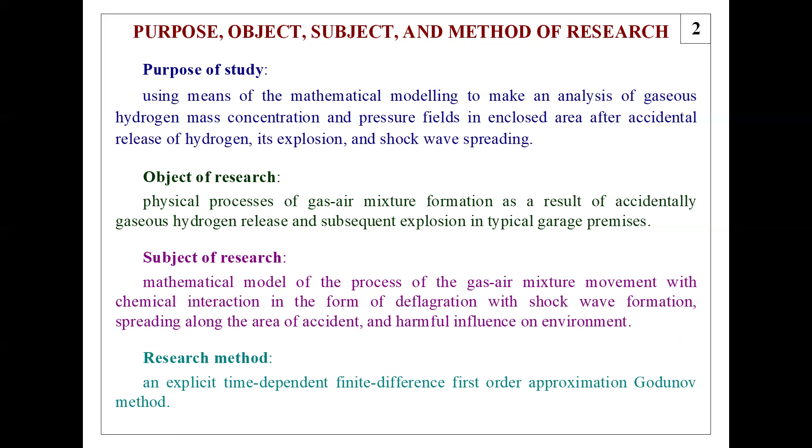The research focuses on the physical processes of gas-air mixture formation and explosion dynamics in typical garage conditions. A mathematical model describing gas movement and chemical interaction during deflagration and shock wave development was developed. The modeling employed an explicit time-dependent finite difference Godunov method of first-order accuracy.

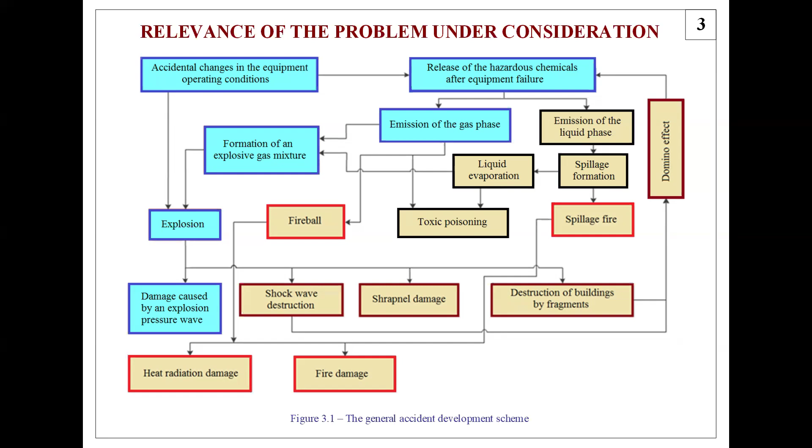The relevance of the study is determined by the need of the community of experts in the field of safety assessment of high-risk industrial enterprises and such civil objects as garages for reliable and effective mathematical models that will allow simulating complex physical processes that arise during an accidental release of such explosive gases as hydrogen into the atmosphere. Such models should replace expensive large-scale physical experiments for analyzing and predicting the consequences of an accidental explosion for the environment.

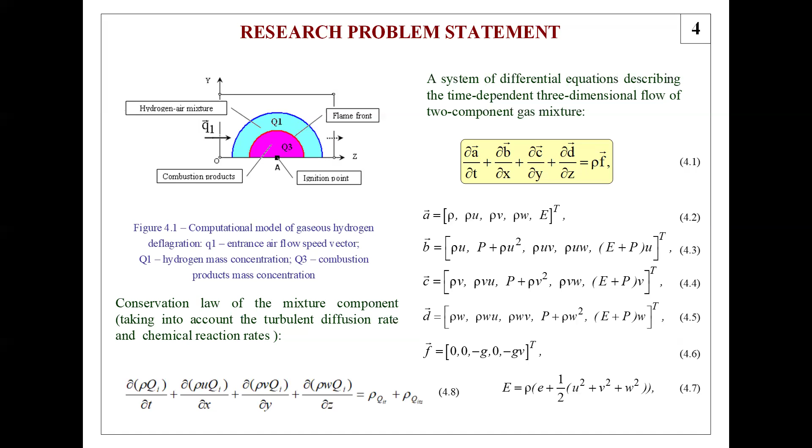The instant release of a given amount of gaseous hydrogen is considered. The admixture forms a gas-air cloud which moves under the influence of the wind. The system of differential equations of motion of a three-component gas mixture includes the laws of conservation of mass, momentum, and energy of the mixture, supplemented by the laws of conservation of hydrogen and combustion products mass. The equation of state of the mixture completes the system of equations.

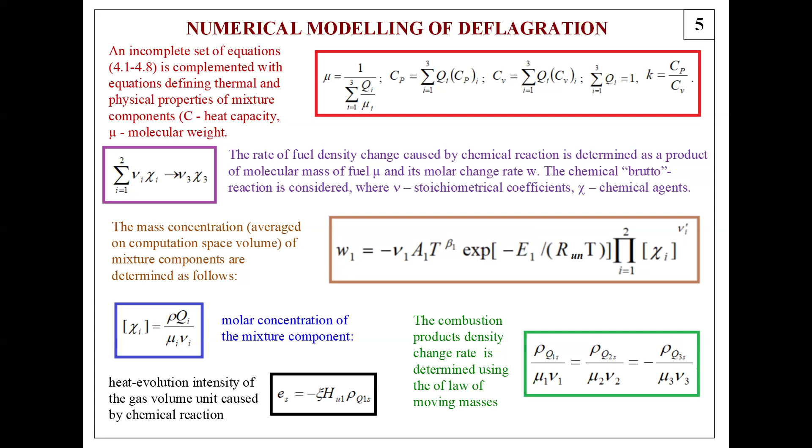According to the suggested combustion model, it is assumed that the chemical reaction takes place in the elementary volume with a rate that can be determined under consideration of the chemical brutto reaction. The molar change rate is determined using the parameters obtained on the basis of experimental data generalization and Arrhenius reaction constant. The density change rate of the combustion products is determined on the basis of the law of mass motion.

The developed mathematical model of gas deflagration was validated using data from physical experiments and other model simulation results. Firstly, an explosion of the hemispheric homogeneous stoichiometric hydrogen-air mixture cloud was modeled, experiments at Fraunhofer ICT laboratory under the ambient conditions. Secondly, the pressure development at distances of 35 meters, point B on the figure, and 80 meters, the point D, from the epicenter of the explosion at the point A, was examined during the computation.

Validation of overpressure in the blast wave front was carried out by evaluating the recommended statistical indicators. The overall quantitative and qualitative analysis of the compression phase of the blast wave at the control points, taking into account the parameters of the wave's impact on the environment, gives acceptable results.

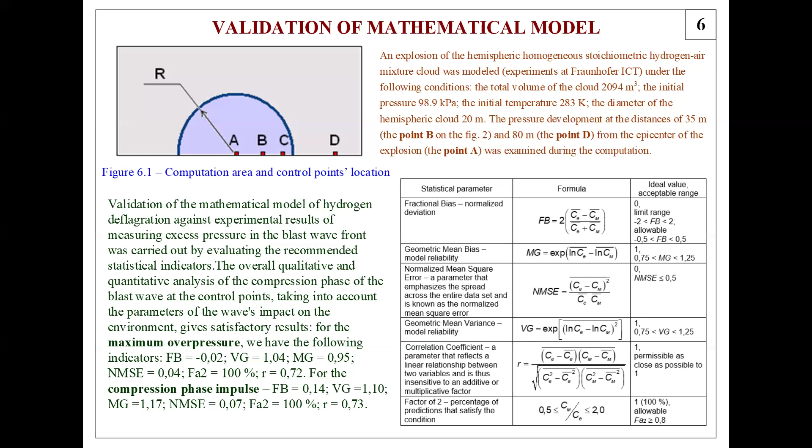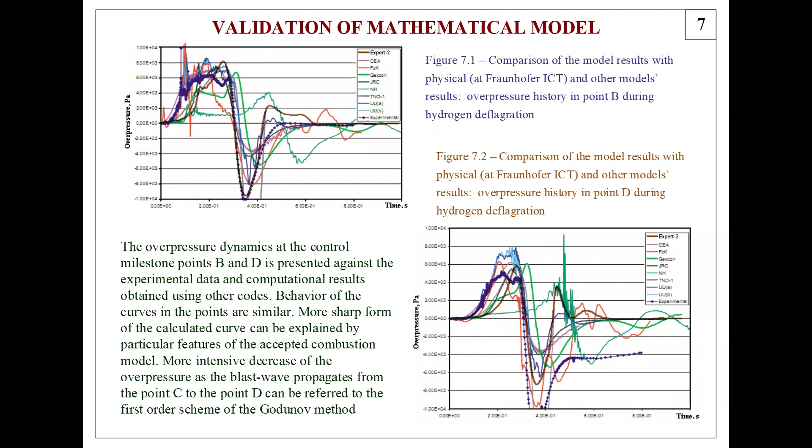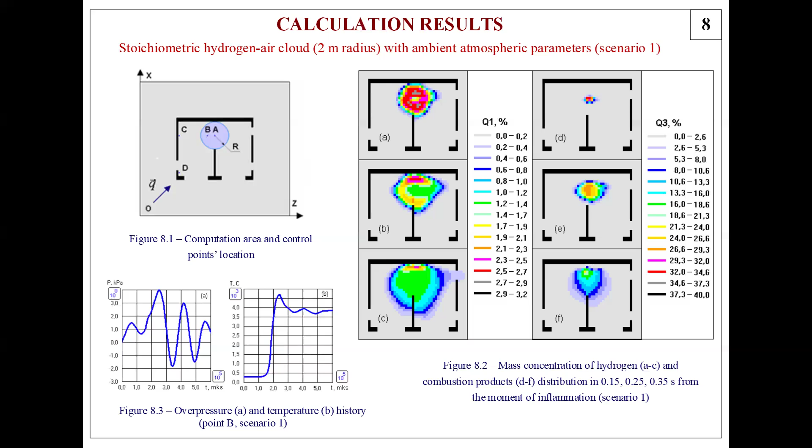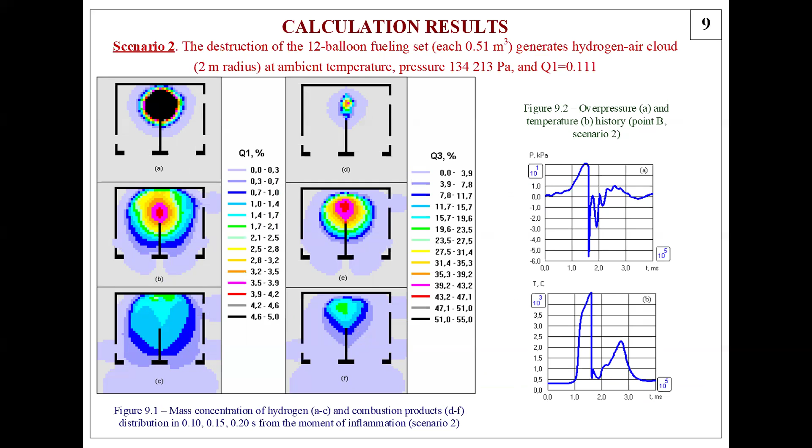The hydrogen and combustion products mass concentration field, overpressure, and temperature history were analyzed. The same parameters were controlled during the second scenario simulation. All diagrams testify to the more intensive development of such harmful factors as the maximum overpressure and the momentum of the compression phase of the shock wave.

And finally, the following conclusions can be formulated. A validated mathematical model was developed to simulate gas mixture deflagration and the dispersion of combustion products in enclosed spaces. The model's accuracy was confirmed through comparison with experimental and numerical data on hydrogen deflagration. Numerical simulations provided time-dependent fields of pressure and concentration for different hydrogen cloud scenarios in standard garage conditions.

The resulting distributions of overpressure and impulse were analyzed to assess potential shock wave impacts on nearby structures and people. The obtained results can serve as a foundation for safety assessments and AI-based classification of hazardous zones in hydrogen-related industrial facilities.